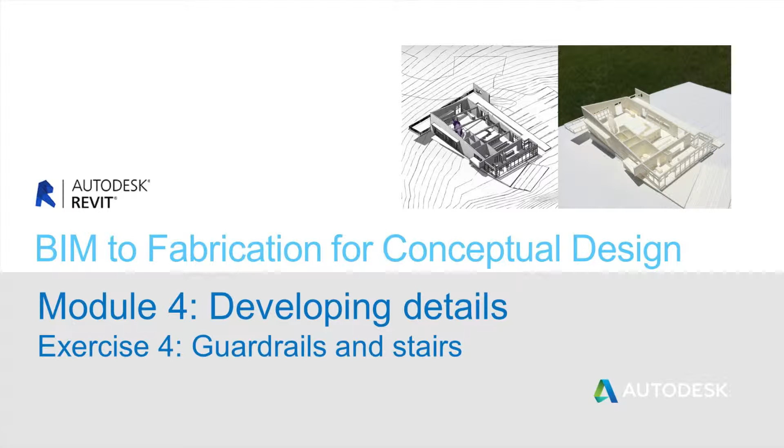Module 4, Exercise 4 is about guardrails and stairs. In particular, same thing as we saw with windows, they can be a little bit difficult to print in situ in the model. So instead, we'll be breaking apart a brand new component and setting up to print. So this is about understanding what is not printable, building a new custom extrusion to replace the virtual handrails, and adding in stairs and guardrail combinations.

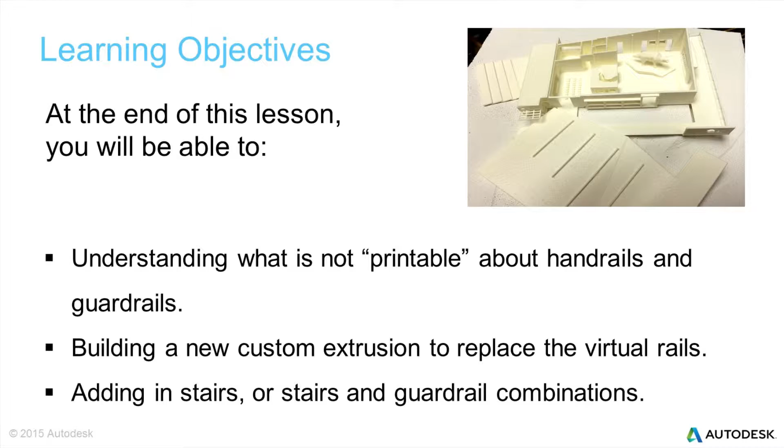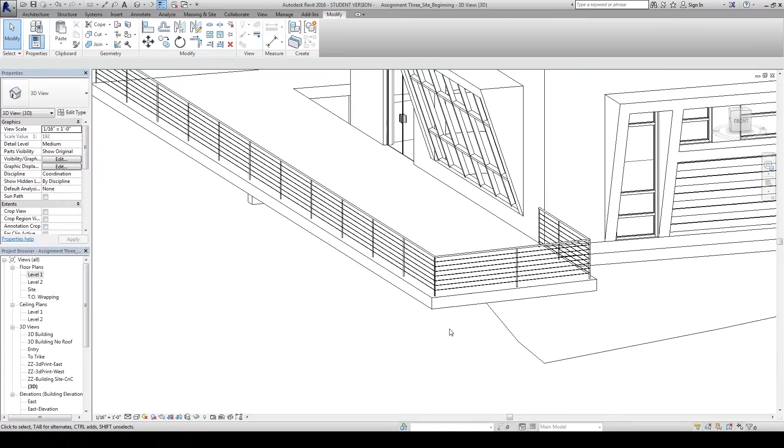In working with the guardrails, again, we have these really small, detailed elements, and I know that they're not going to send themselves to the 3D printer as part of my overall model. They're too delicate, they're too fine, we've got too many elements that are spanning. But what I do know is that, again, we can isolate those and we can print them as individual pieces flat on the build plate on the Replicator 2, or any 3D printer for that matter, as long as I make some basic modifications to how this is set up.

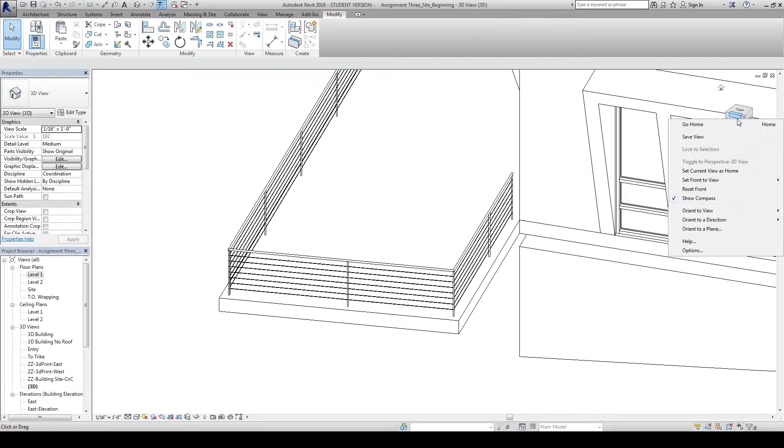So this is a guardrail with a wire on the inside, and so what we're trying to do design-wise is get the idea of the top rail and the baluster with a very refined and sort of transparent piece overall to the handrail. So what we'll do is we're going to first orient to a plane and get an idea of what we're looking at. And you can see this is kind of a difficult view to read.

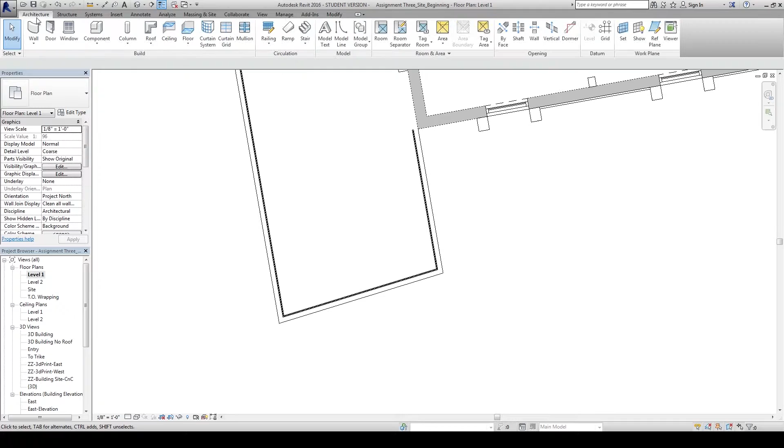So rather than building another custom view with a sort of a far clipping plane, something like that, I'm just going to build a really quick backdrop. This is a technique that I use quite a bit inside of Revit. It's just kind of throw something in just to isolate the view and build something that's really easy to see. Again, it's not always the right technique, but it's a technique that you can learn that works really well.

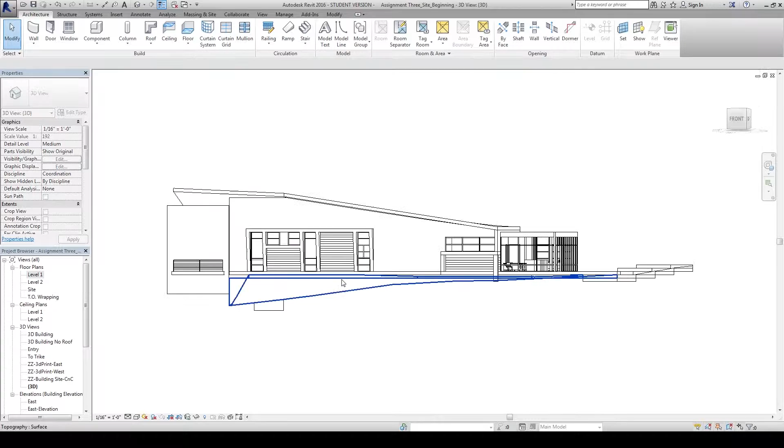So I'm going to go back to my view cube again. Orient my view to a plane, select that outer edge of the deck, and now when I zoom in, you can see I have that view sort of nicely clipped there so I can see things really clearly.

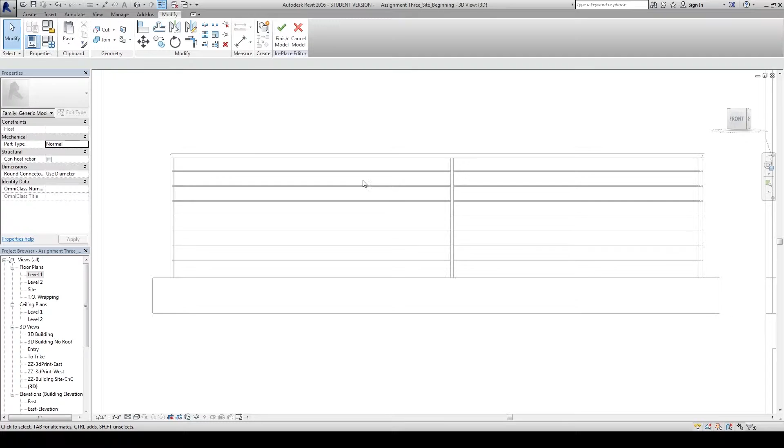So what I'm going to do is build a custom component for this, because again, that default rail isn't going to print very easily, and the rails are also a little bit tricky to customize in terms of their size. So both size and shape. And so I find it a lot easier to just build a really quick extrusion as a custom component. So I'm going to set my work plane, again, on the outer edge of this deck.

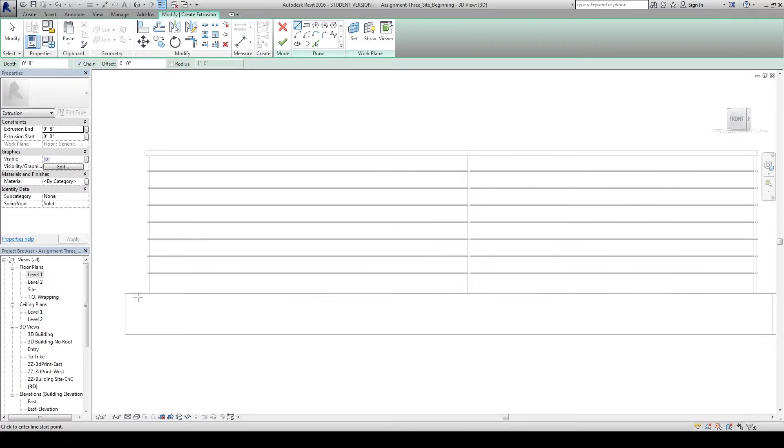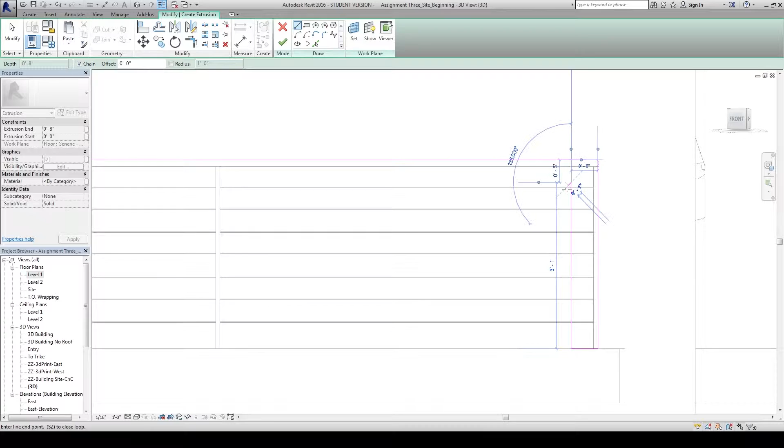Need to make sure I'm getting that perfect geometry right there, that edge of polygon. And I'm going to simply trace around the outer edge of the line work. So this will establish sort of the out-to-out perimeter for the handrail, or the guardrail, I should say. And again, we need a minimum dimension, probably of about 6 inches. I know that's going to build something that is at a 16th inch scale, roughly a 32nd of an inch thick.

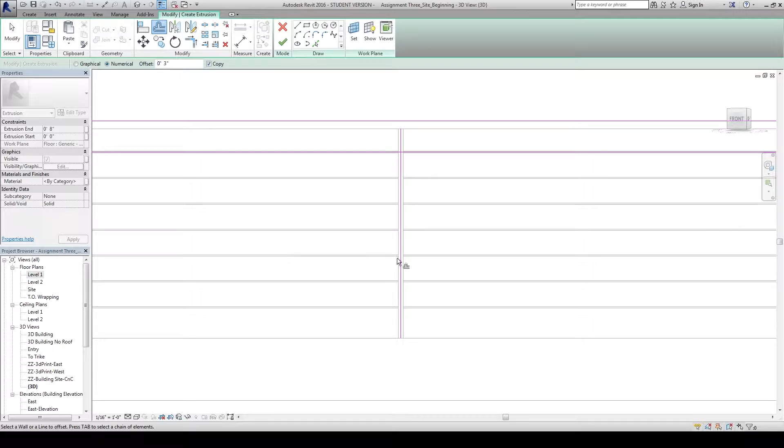So we'll just use the offset command to continue to build that up. We need to build the center baluster. So again, top to bottom, offset, and we'll offset 3 inches to each direction. Delete that initial guide. And now it's simply a matter of closing up the geometry.

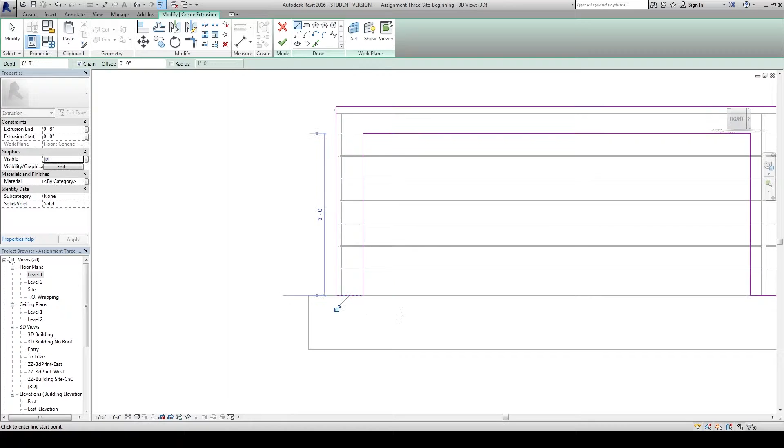Remember, anytime you're working with an extrusion, you have to have a closed loop. So I'm going to use split and trim to finish off the geometry. Make sure I don't have any extra lines anywhere, and make sure that everything, again, is in a closed loop so that the extrusion will run smoothly. Leave one more piece to trim.

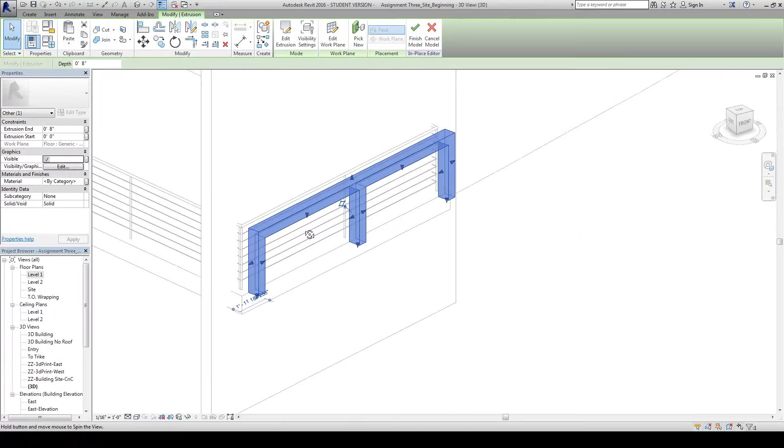Then we should be able to run the extrusion. I'm going to set a depth of about 8 inches, again just enough to get me the material that I need. While this looks fairly clunky and too bulky in the model, when it prints out it's going to be really small. So it'll be too big to scale, but at a 16th of an inch, it's going to work very nicely.

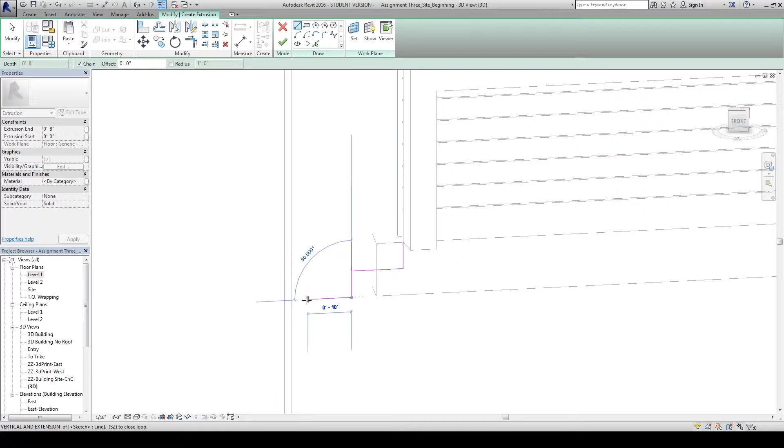Let's go ahead and also add a stair to this. Even though there's really not a stair in place in this model, I wanted to show exactly how I would go about building a stair as well. So we're just going to build a very quick and short, fictional 6-inch by 12-inch stair right off the edge here, simply to show how this would come together.

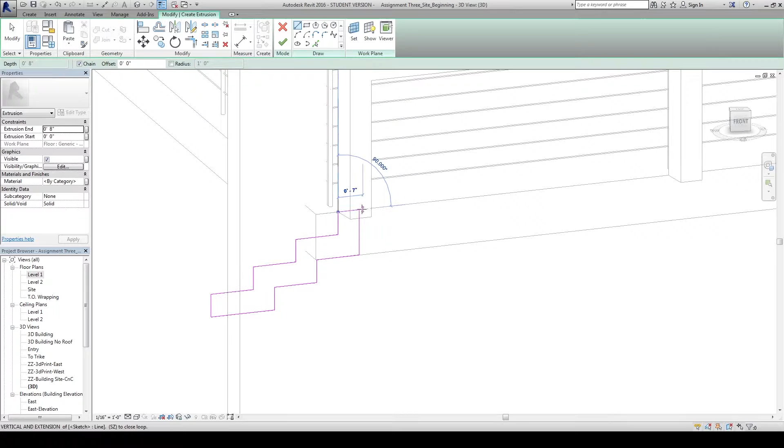Give that a thickness. Again, 6 inches is kind of that magic number for working with a 3D printer. Then we'll trim and build this as a closed loop. If you have an actual stair you're working with, it's really quick to just trace everything out on that existing stair. Then we're going to stretch it over, about 5 feet for this case.

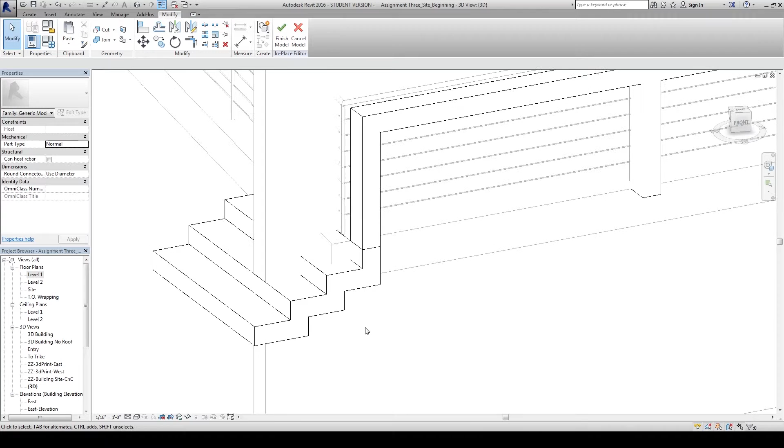So you can see that's come together as its own component piece. Now if I wanted a handrail on this stair, or a guardrail I should say specifically, it's easy enough to just go ahead and modify that guardrail I was currently working with to go right down along with the staircase. So we'll edit this component.

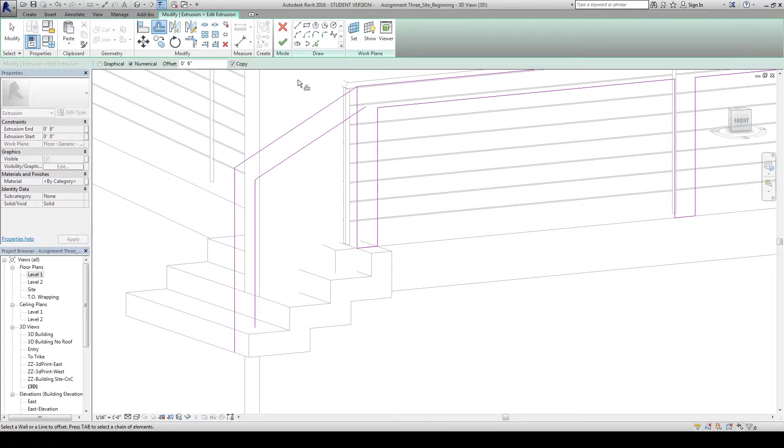What I need to do is start by working with the front edge of that last step. I'm going to use my Pick Lines tool, give myself something to snap to. We'll come up 42 inches, standard guardrail height. Connect that to the top rail on my guardrail on top of the deck, offsetting 6 inches. Pick lines to get the bottom. We want that to attach perfectly to the staircase.

Now again, we're ready to trim these lines and delete that bottom line. One more line to trim at the top. Now you can see how we've taken that guardrail and turned that into the stair rail as well.

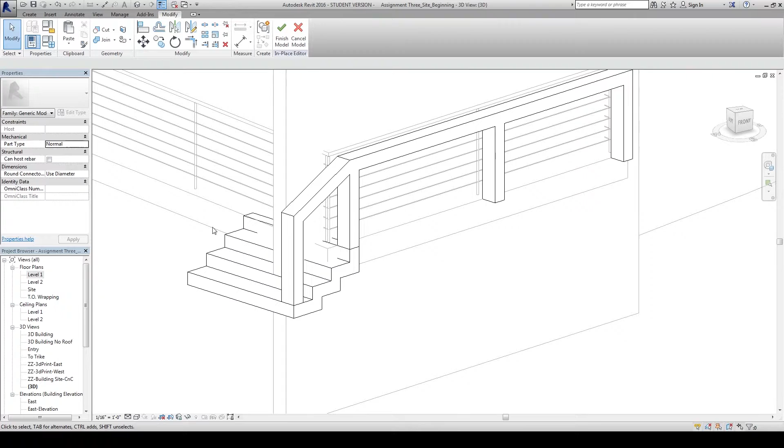So for the other side, again, we're going to print this on edge. The second guardrail I would actually need to print out separately as its own pass and then glue that right to the top of the staircase. So this piece is pretty much ready to isolate now.

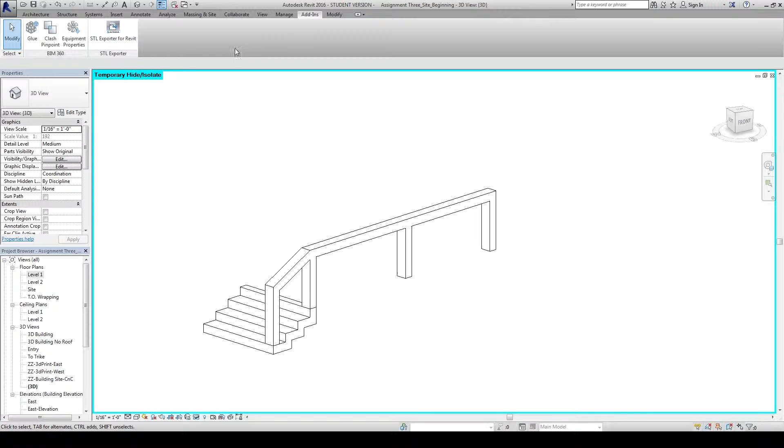And export as an STL file. We'll bring that into Makerware. Inside of Makerware, we'll add the file, move it to the platform, establish the scale, 158.69.

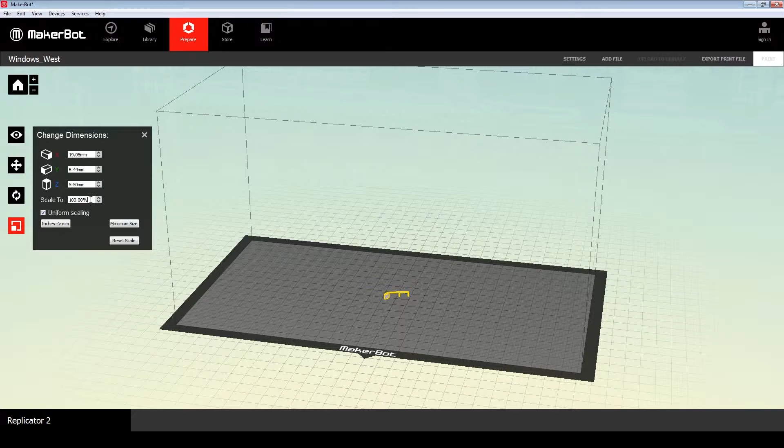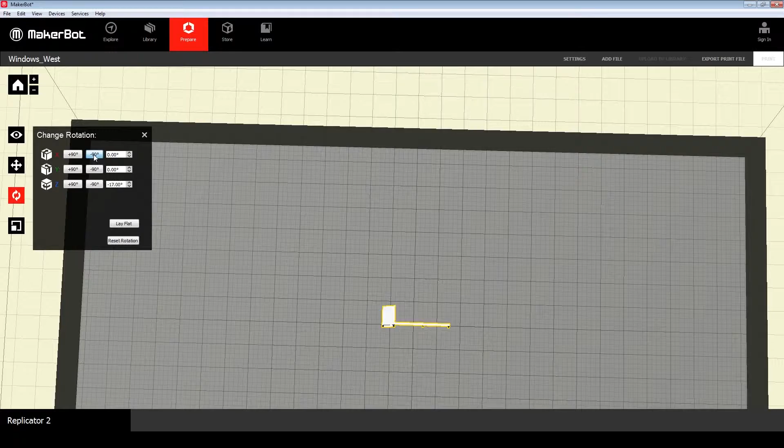That should be completely ingrained in your head by now. You can see what we want to do is go ahead and rotate this around and put that guardrail down flat and let the stair grow up vertically on the print. So again, we just need to approximate the rotation because we'll use the lay flat command inside of Makerware to put that edge perfectly on the base plate.

And this guy is now ready to go. Again, I would use probably the standard print resolution and no raft because this is going to be a fairly small, delicate element.

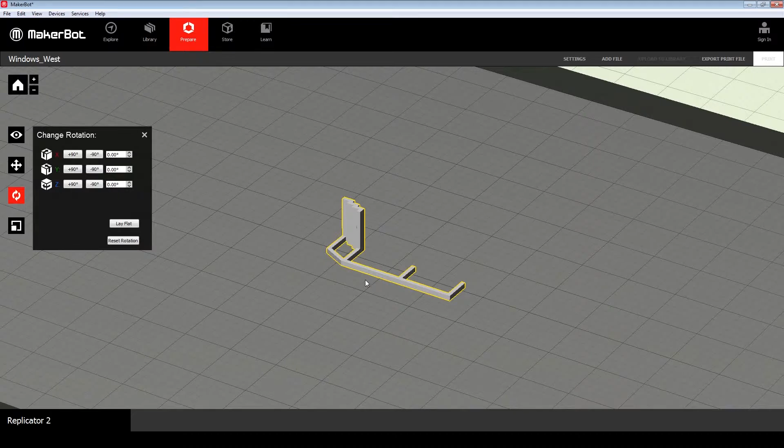So what looked clunky in Revit is a really nice refined handrail for a 16th inch architectural model. In this lesson, we've learned how to acknowledge why printing stairs, handrails, and guardrails in place usually doesn't work too well. We've also built a new component for the guardrail or a stair, and we've built printer settings for finer detailed objects.